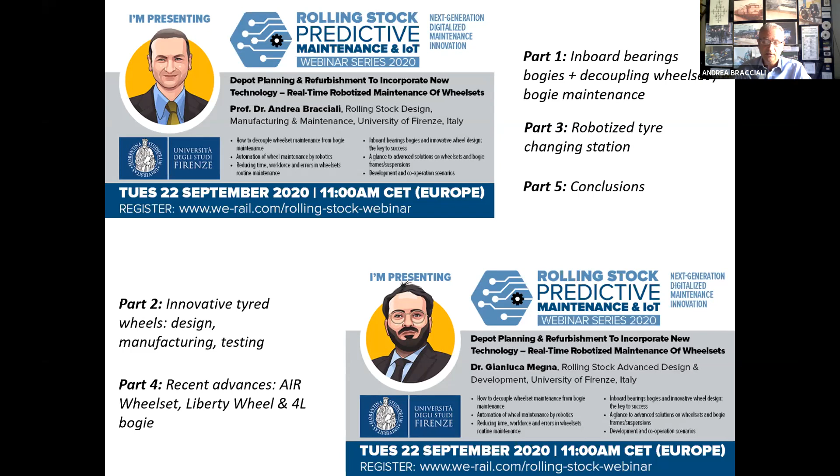I start with an introduction about inboard bearing bogies and how to decouple the wheelset-bogie maintenance, which is at the beginning of our study, research and development of a new geometry for tyred wheels.

Basically, we know that since the beginning of the railway era, we've had a mixture of inboard bearing bogies and outboard bearing bogies. Even the Rocket was manufactured with 2 types of bearings, so the locomotives had inboard bearing bogies and the tender had outboard bearings. The same principle remained along the years for many decades, for more than one century or one and a half centuries.

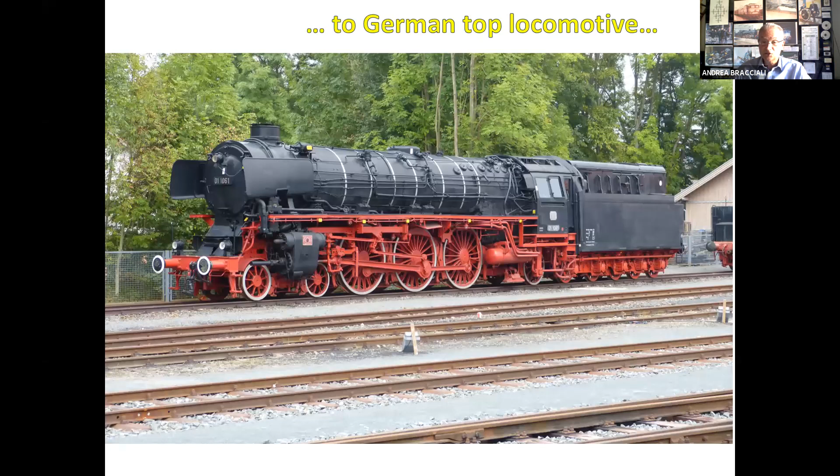In all steam locomotives, like the Italian top locomotive, the German, the French, or even the British top locomotive - everybody knows the Class A4 by Sir Nigel Gresley, one of the most famous locomotives in the world - they all had one component in common, the inboard bearing bogie. So this is certainly not new, it's something that existed since the beginning of the railways.

But in recent years it has gained a great revival, or great fame, because of some important features.

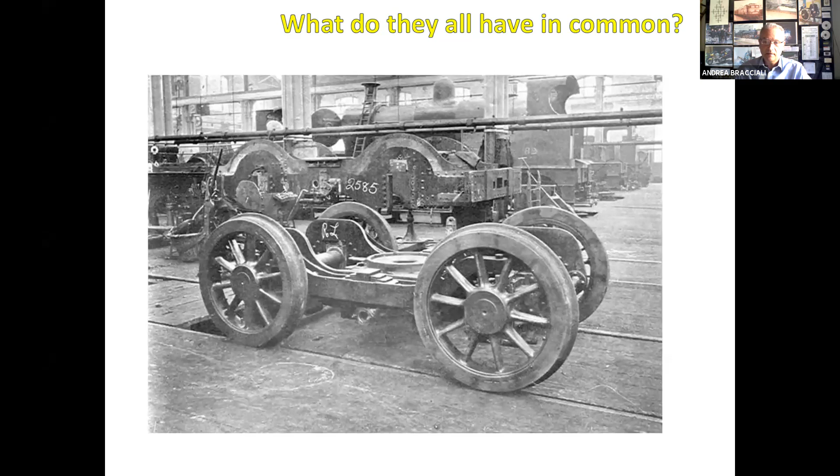Great Britain has been the country where the modern inboard bearing bogies were developed. Probably some of you know the studies by British Rail Research that led, at the end of the 80s, to the rollout of the B5000 bogie, in 1989. I personally had the chance and great pleasure of meeting one of the designers of the B5000 bogie.

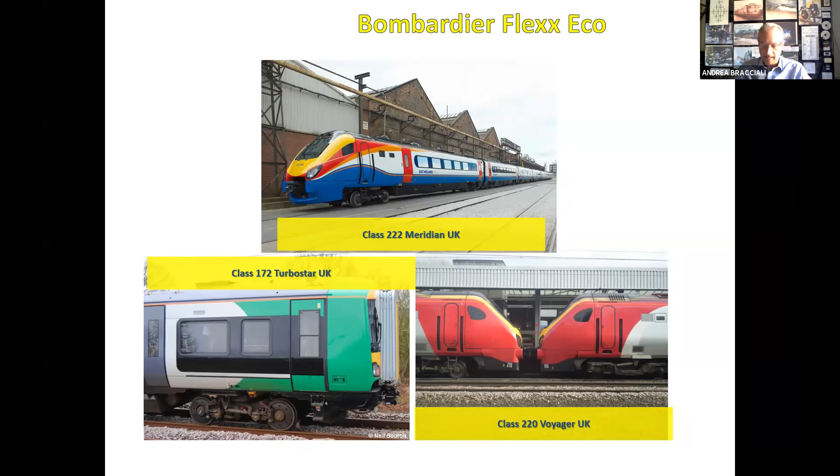A number of vehicle classes were running in the UK in the last decades, equipped with inboard bearing bogies. The project was then developed by Bombardier, which today markets a further developed bogie under the brand name FLEXX Eco.

This FLEXX Eco bogie developed further along the years - I know many colleagues in Derby who worked on this bogie - and recently it was widespread in the Aventra class of vehicles, which has a number of variants because it was bought by different operators. As of nearly 3 years ago, more than 2,500 vehicles were ordered by 6 operators. So inboard bearing bogies by Bombardier are widespread in the UK.

Bombardier is not the only company developing this kind of bogie. Hitachi has developed an inboard bearing bogie for the trailer car of the IEP class, a huge program to renovate and renew the fleet of intercity trains in the UK.

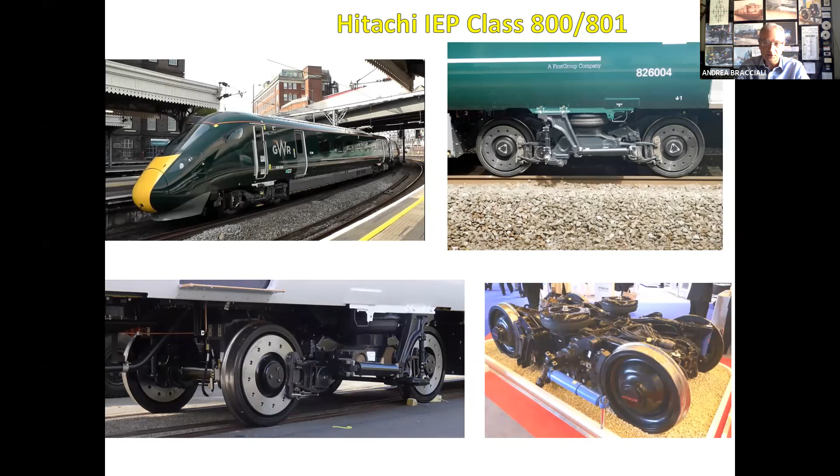The same concept was developed by Siemens for the SF7000 bogie that equips the Class 700, the Thameslink Desiro City. This bogie was so successful that we'll go back to this in a few seconds.

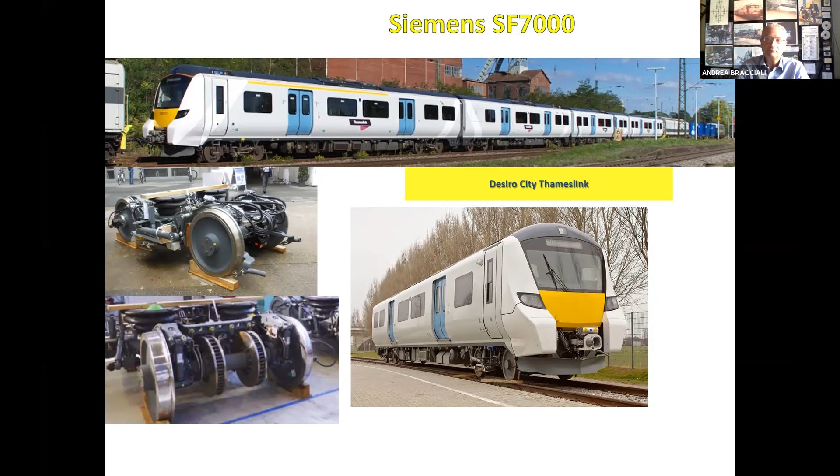More recently, CAF delivered to TransPennine Express some EMUs called the Class 397. You see some pictures of the vehicle: in the top right, at Velim circuit in Czech Republic during testing, and in the lower picture somewhere in England. You see that this vehicle has brake discs mounted on the wheel web.

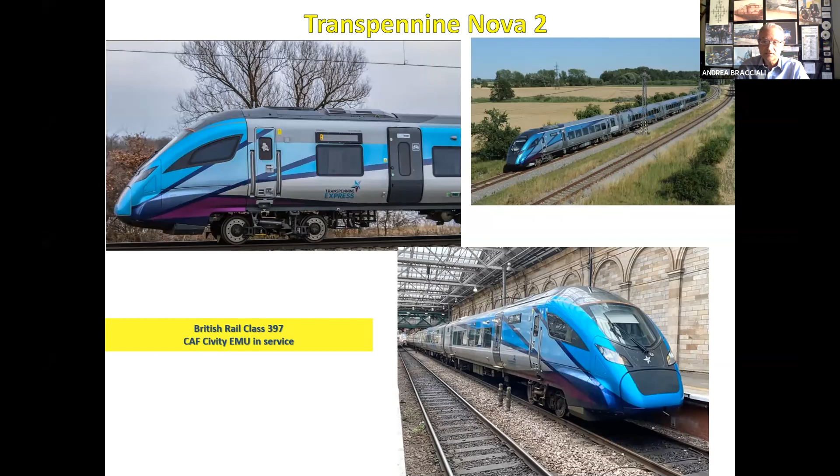Similarly, similar vehicles were developed by CAF as conventional trains, so no EMUs, but shuttle trains. This is a Transpennine Nova 3, and beyond the locomotive, that is a diesel locomotive manufactured by Stadler, CAF supplied the Mark 5A coaches.

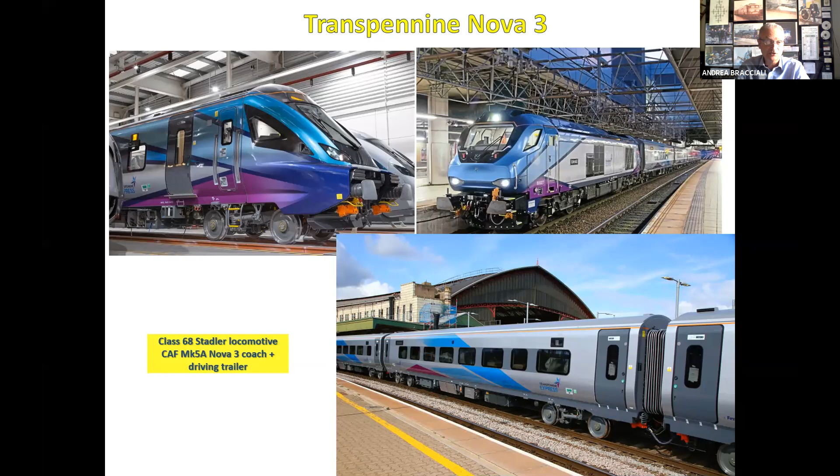You see that the brake discs here are mounted on the axle, and the wheels have no components attached on them. The same vehicle, slightly different, is called the Mark 5 and is a Caledonian sleeper. You see some pictures; you can find plenty of pictures on the internet about these vehicles.

What is interesting to see is that the last, to my knowledge, actor that developed an inboard bearings bogie is Stadler, that designed - I know personally the designer of this bogie in Valencia in Spain, the former Vossloh company - this is Class 777 for Merseyrail. You see that there are some Jacobs bogies, so you can find conventional bogies as well as Jacobs bogies equipped with this architecture of inboard bearings.

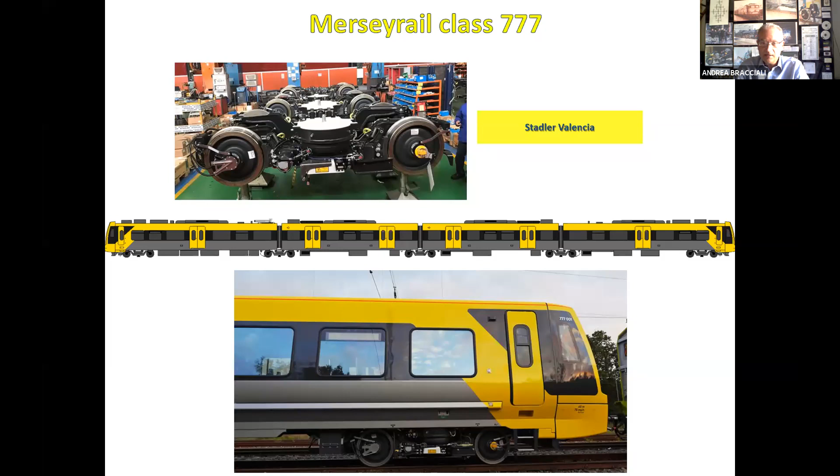Outside the UK, outside Great Britain, there are some very interesting applications. The ICE4 of the German railways, that's a train manufactured mostly by Siemens, but some rail cars, some car bodies, and the trailer bogies are manufactured by Bombardier.

It's the same concept as the Flexx Eco bogie. You see in these pictures the trailer bogies in the upper two photographs. In the lower photograph, you see two cars connected, and the rightmost one has a motor bogie by Siemens, and the leftmost one has an inboard bearings bogie. You can see the difference in the architecture, the wheel diameter, the wheelbase, and all the differences of the two bogies that are immediately apparent when you look at this picture.

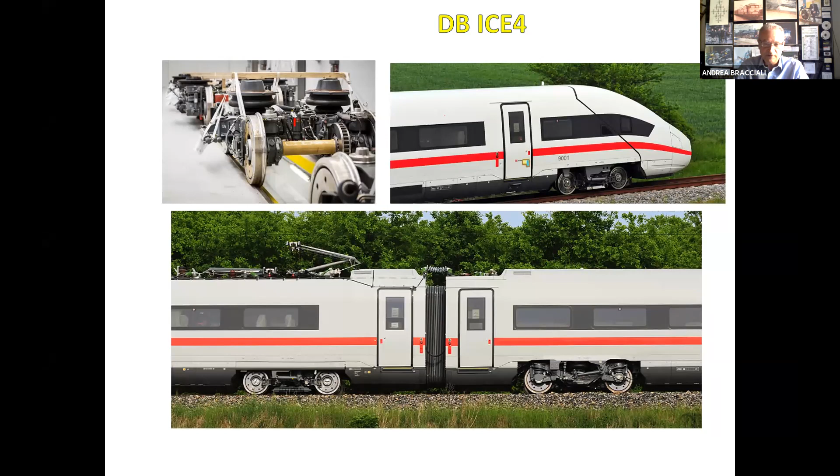The idea, the concept of inboard bearings bogies is so successful that Siemens decided to develop a specific platform for regional railways. This is an EMU, and the concept of SF7000 was developed into SF7500, which, as written in this leaflet, has greater energy efficiency, higher flexibility, and so higher and predictable profitability.

The reason for the large use of inboard bearings bogies in the UK dates back to October 17th, 2000, when the Hatfield accident put in evidence what's the problem of rolling contact fatigue and track friendliness.

Since then, a number of studies were developed in the UK, and today, to my knowledge, Great Britain, or Network Rail, is the infrastructure owner that has the most advanced track access charging method that rewards those who damage the rails the least.

And inboard bearings bogies have a distinct advantage from this point of view. So if you want a train that introduces low track damage, you probably have to use an inboard bearings bogie.

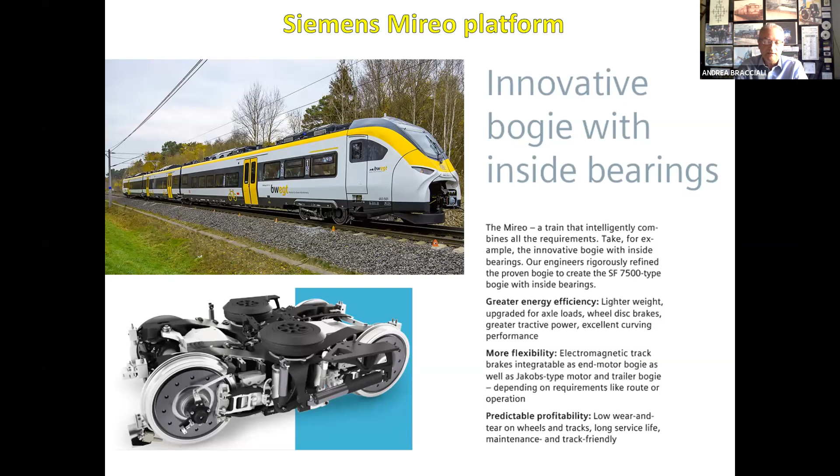This architecture is the best starting point for our study, because if you look at the pictures - if you scroll back once you have access to this presentation - you see that many of these wheels are really in sight. There is almost nothing in front of the wheels, so the wheels can be accessed from outside without the limitations of outboard bearings bogies that have the axle box arm and the primary suspension.

If you look at the tyred wheel, this is a concept that Gianluca will develop in more detail later. The shape, the wheel consists of three parts: a wheel center, a wheel tire, and a retaining ring that in the UK is also known as a Gibson ring.

Today, wheels are designed for infinite life and axles are designed for infinite life. But as a matter of fact, monoblock wheels are scrapped when the tread or the flange are worn, and the whole wheel is scrapped, despite the fact that it was designed, I repeat, for infinite life.

Axles as well have a finite life, because removing worn wheel sets and installing new wheels may damage the wheel seats on the axle, so the axle has to be reprofiled from time to time, and at the end it results in the need of scrapping the axle, even if it was designed to have an infinite life. So also axles at the end have finite life.

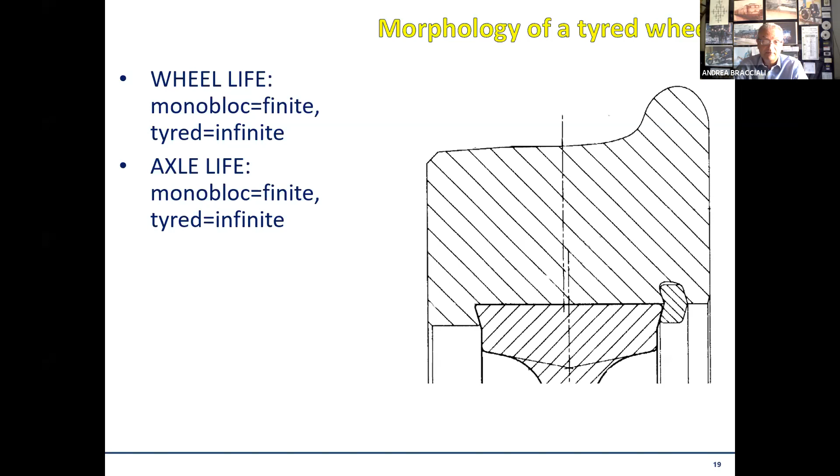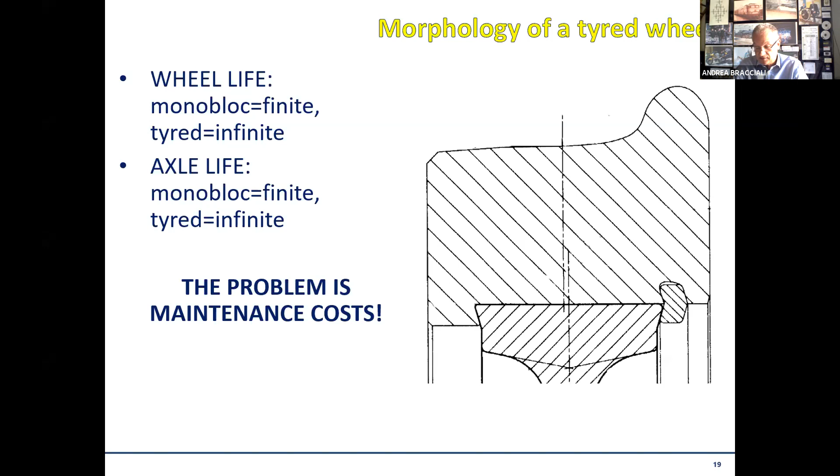The problem of tyred wheels is maintenance, because maintenance of tyred wheels is particularly expensive. I have shot some pictures in a workshop that is homologated.

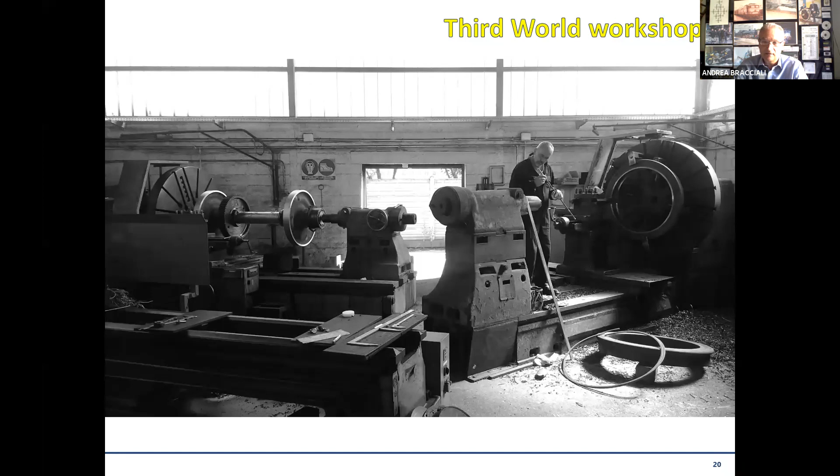It is qualified to perform maintenance to tyred wheels. These pictures were not shot 50 years ago, but just a couple of years ago. It looks like we are in the 50s, but it's just 2018, and this workshop is in Italy. Everything is manual, not automated. It's just the operator that has to decide the diameters, check everything, and clearly this is a nightmare from a costs and working time point of view.

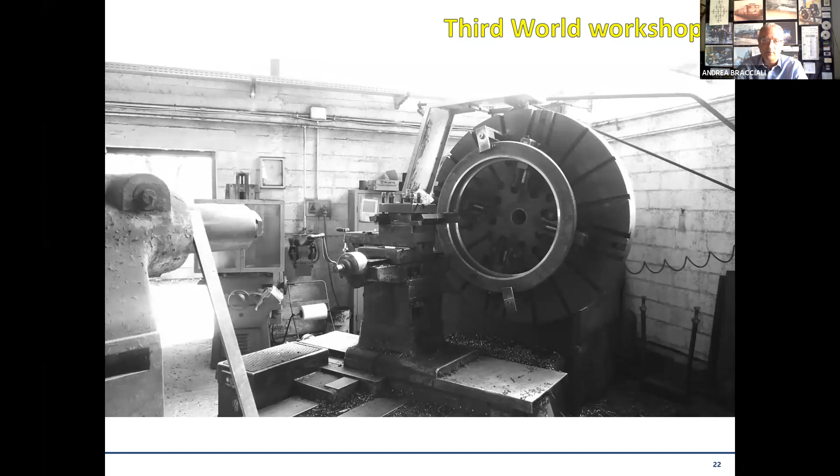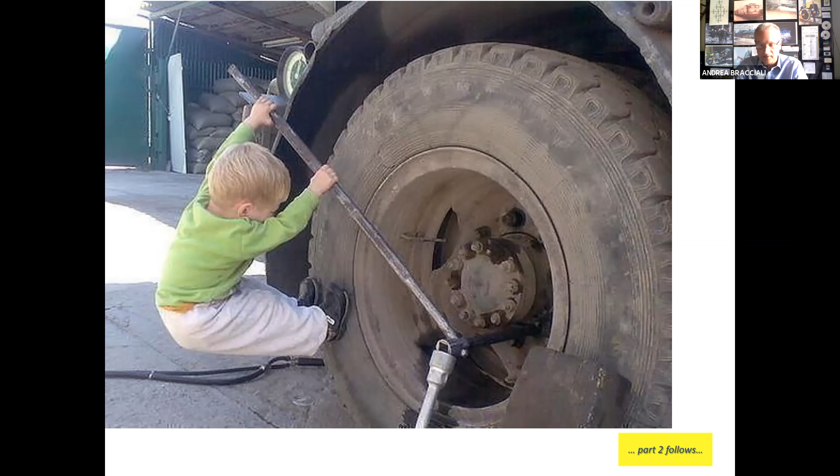But the idea would be to have the possibility of changing the wheels, as this little child does. This is what Gianluca will explain in part 4, as part of our other ideas. We will not discuss too much about this today. I would like to pass the microphone to Gianluca now.

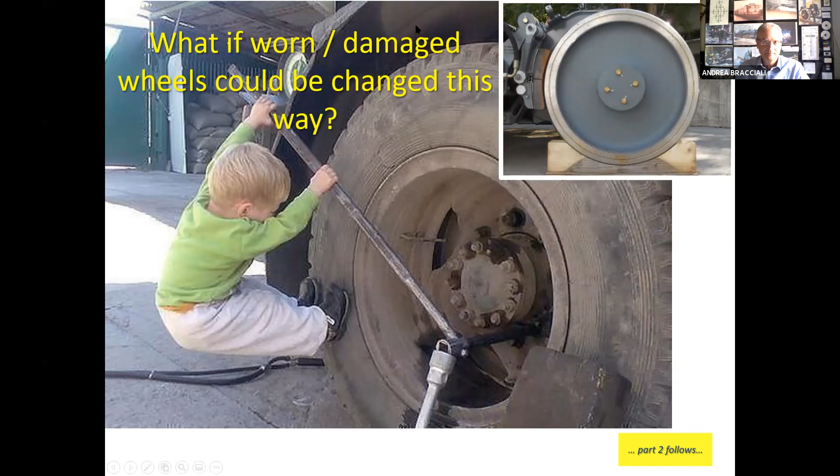I'm starting the second part of the presentation. In this second part, we pass from bogies to wheels, and we are going to see the design, manufacturing, and testing phases of an innovative tyred wheel that we have developed.

As explained briefly by Professor Bracciali, today monoblock wheels are the preferred solution for vehicle manufacturers, and they have almost completely replaced tyred wheels. There are several reasons for this choice, but the main one is maintenance. Monoblock wheels have simpler maintenance because tyred wheels are made of three components: the wheel center fitted on the axle, the tire fitted on the wheel center, and finally a retaining ring applied manually to complete the assembly.

The procedures and operations to complete this assembly are quite long, and often several machines and tools are needed, while in monoblock wheels the replacement of the wheel is the only operation, and there is no need for special tools or anything like that. So a big automation has been reached in the last years.

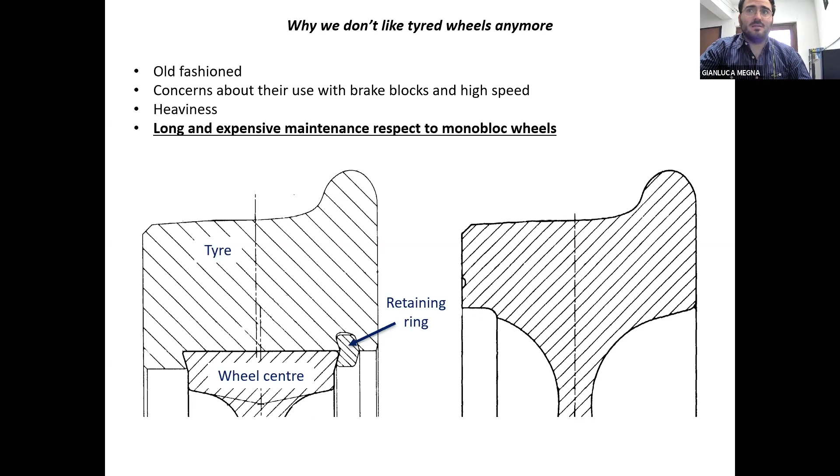So the main advantage of having a removable tire, and therefore reducing the purchasing cost, for example, or having an infinite life component as the wheel center, just like the axle—these advantages are cancelled by the tire fitting and removal processes. Here you can see a short simulation of the tire fitting, and the mounting parameters such as the thickness of the tire, the mechanical interference between the tire and wheel center, bring also high stresses and strains in the wheel center.

So tire fitting has to be carefully defined beforehand, in the design phase.

Here you can see some pictures of a tire replacement of a tyred wheel. In the top left picture, you can see the wheel set placed on a wheel lathe and the mechanical removal of the retaining ring. So the wheel set is moved to an alternating saw where the tire is cut, and then it is extracted.

Often the extraction of the tire leaves some scratches on the wheel center, on the external part, and therefore it has to be machined again, and the mating diameter changes, and the new tire has to be adapted to this new diameter. So there is no interchangeability between components, and the process is an adaptive process.

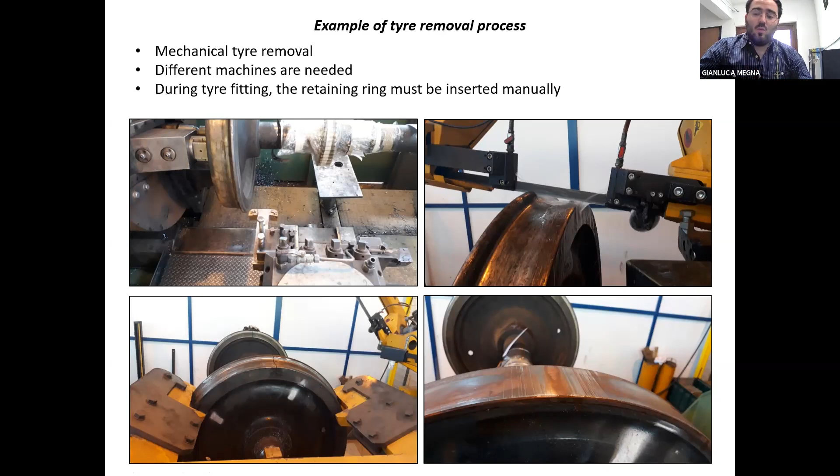One way to remove this problem is to use heating to heat the tire and remove it. Here you can see an induction heater applied to a worn tire, but the mechanical removal of the retaining ring has to be maintained. Here you can see, in the yellow box, the grooves left by the wheel lathe to mechanically remove the retaining ring.

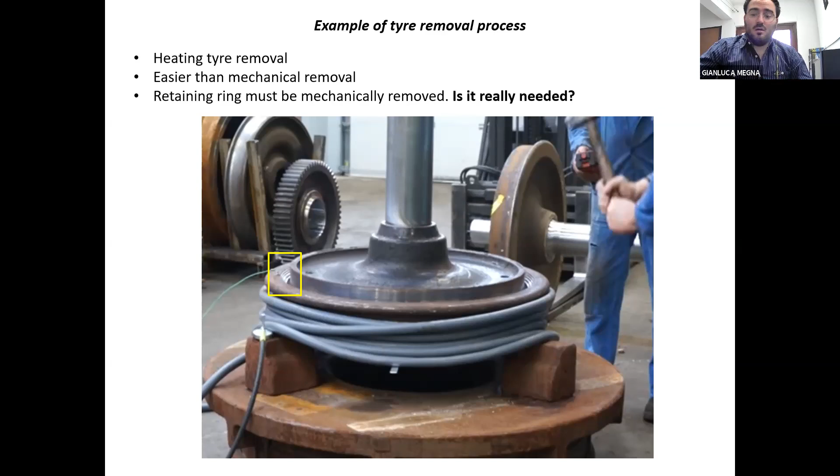So the retaining ring is the main obstacle for the improvement of the maintenance of tyred wheels. And the question is if it is really needed, and the answer is no. The reason for using a retaining ring has to be found considering the tread braking problem.

Tread braking in all railway vehicles is critical, especially for freight vehicles. Also monoblock wheels suffer from tread braking, and cracks could be generated, and a specific design needs to be applied also for monoblock wheels.

Tyred wheels were developed when tread braking was the only solution, and therefore all the mounting parameters such as tire thickness and mechanical interference between the tire and the wheel center were developed to withstand this kind of thermal input.

But in 1968, some tests showed that the loosening time of the tire could be lower than 10 minutes if a continuous braking power is applied. So tyred wheels are unsuitable for drag braking and tread braking.

The retaining ring is the only component that locks the tire radially when the problem of easing during tread braking is generated. But today we have disc brakes in almost all passenger vehicles, and electric braking from the motors, and other solutions, so tread braking is not so critical anymore, at least for passenger vehicles and not for freight vehicles.

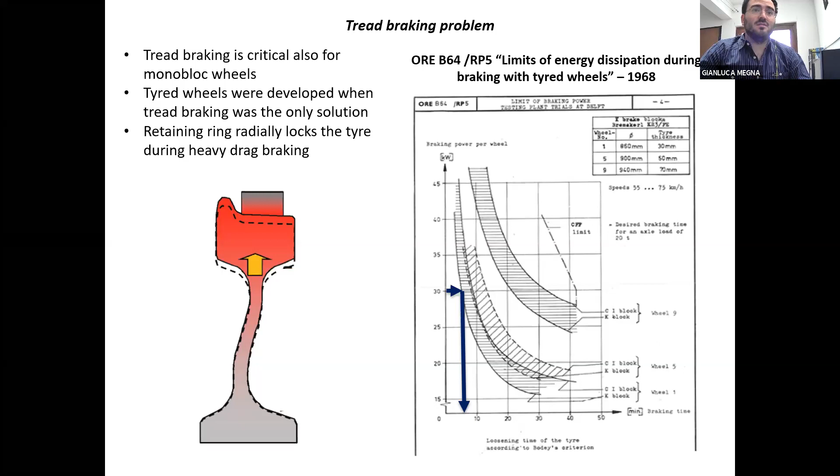So we can do something more to improve this kind of wheel design for vehicles not equipped with tread braking. The solution we proposed is a simpler dovetail coupling, a double conical coupling that can be easily machined with modern CNC machines. Obviously, the dovetail in this picture is amplified, but we can see some real pictures in the following.

Thanks to the elimination of the retaining ring, we can achieve an easier fitting and removal of the tire, using heating, for example an induction heater, to heat the tire and remove and fit them.

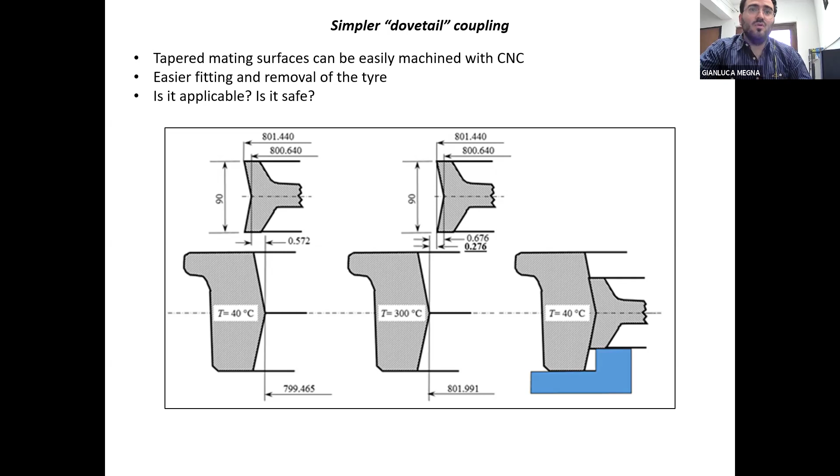Some finite element calculations have been performed to understand if the coupling is safe from a mechanical resistance point of view. We simulated a brake pressure test on the tire, and we have seen that no displacement between the tire and wheel center is reached even with a lateral force 10 times greater than the maximum lateral wheel-rail contact force.

As you can see in the picture below, we have developed an asymmetric coupling because the lateral forces at the wheel-rail contact are different according to the direction of application of the lateral force. This comes from the design code for all railway wheels according to EN standards.

So the coupling is safe, and therefore we decided to produce some prototypes. Here you can see some pictures about the machining of the tires, the machining of the wheel center, and the results on both of them are visible here.

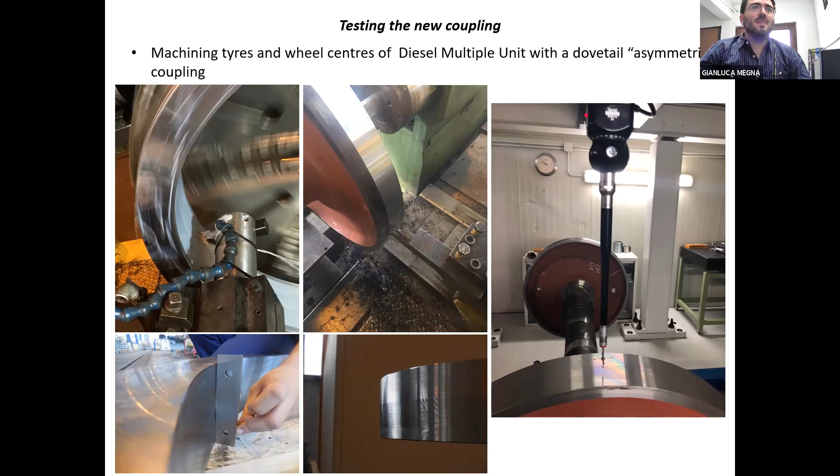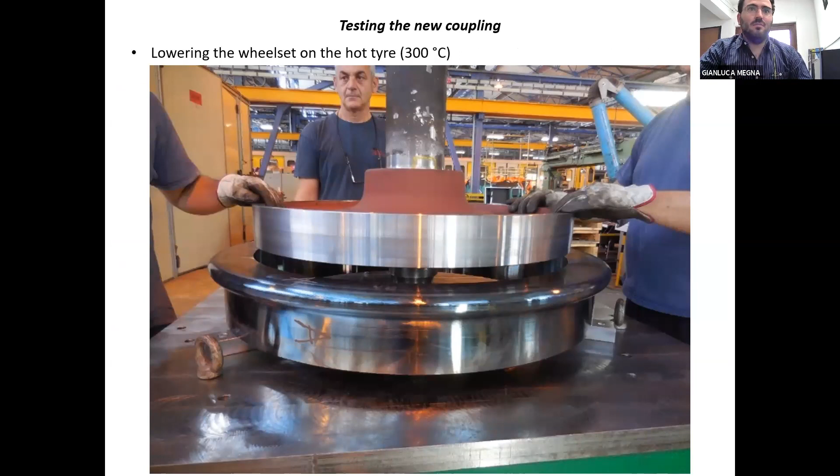Then we mounted the tires on the wheel centers. Due to the shape of the new coupling, the mounting has to be done vertically, so it could be a problem, but we found the solution later.

After the cooling of the tire, we performed some measurements to verify that all the tolerances according to EN standards were respected. For example, axial runout, radial runout, width gauge, and unbalances were measured, and even with fully finished tires, all these measurements were within good tolerances.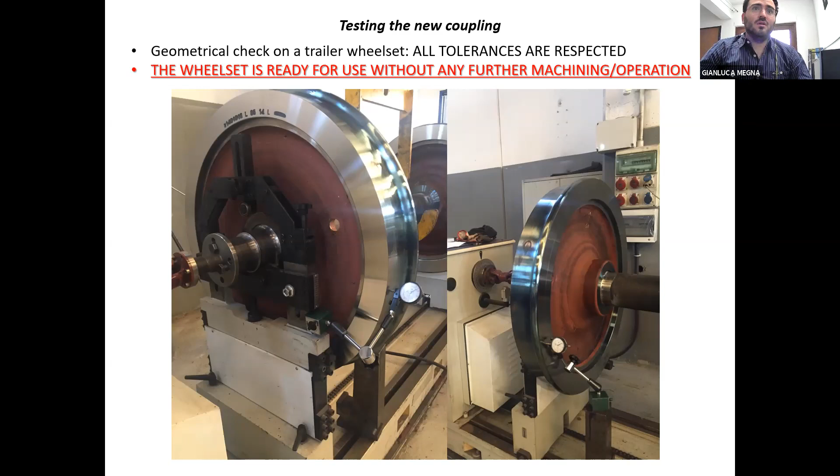So no further machining or operation was needed after the mounting of the tires. We prepared 4 wheel sets to be assembled on 2 bogies, so 1 coach, and we performed 2 days of testing. Here you can see a picture.

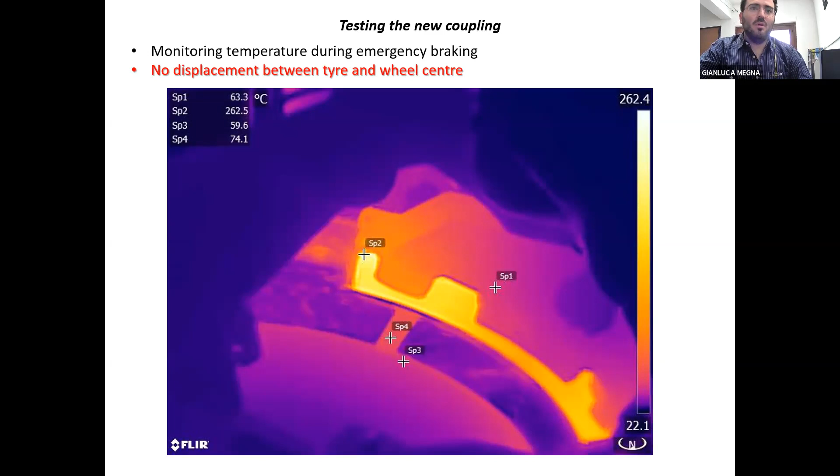During this test, several stopping and starting maneuvers were applied to verify the strength of the coupling. The vehicle we used had tread brakes, so we monitored the temperature using a thermal camera, and even with some emergency braking maneuvers performed, no displacement or other problem was found during this test.

So the final solution has been found considering a different kind of coupling, but it is only dictated by advantages in mounting procedures. Here you can see the final drawing.

We no longer use the dovetail, but we have a single conical surface, a single tapered surface, and we restore an abutment on the left, which is used for an axial reference during mounting. In this way the mounting can be done also horizontally and not vertically as shown before.

So this kind of solution will be made more clear in the next presentation, and I give the microphone to Professor Bracciali.

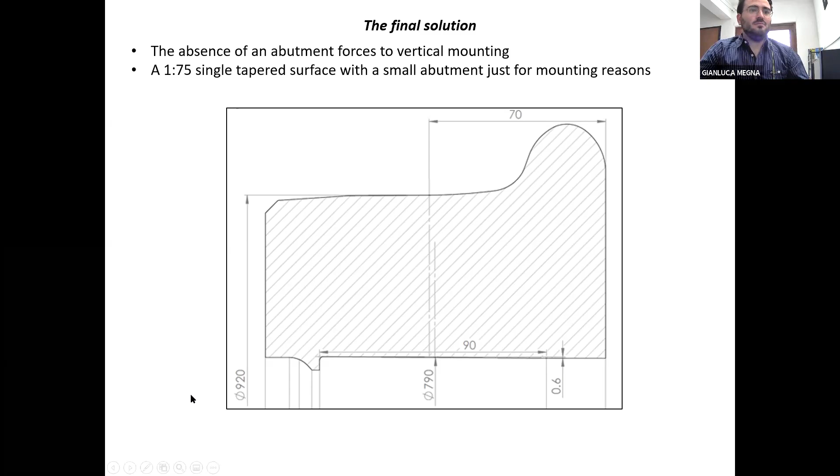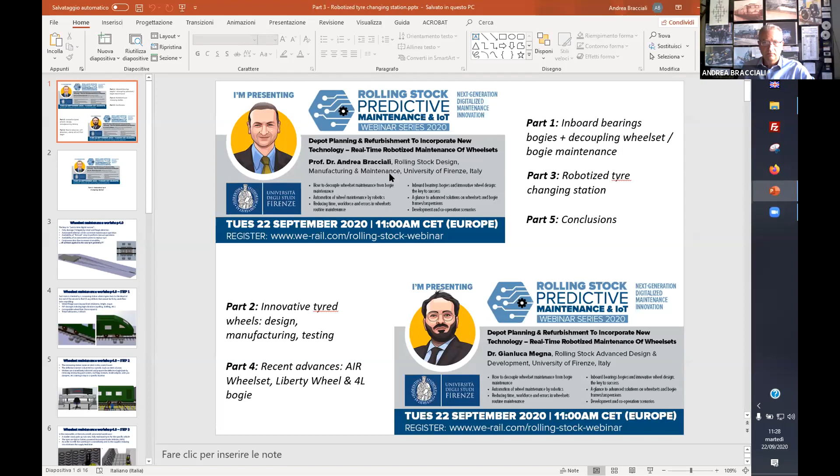So we go again with a third presentation about the tire changing station. Okay, probably you don't see me, but that should not be a problem, I think.

This will ensure continuous flow of data for traceability and for management of new material, purchasing material, and scrapping old material.

Let's look at the steps of a fully automated robotized station we have conceived. First, the train goes back to the depot, let's say around midnight, at the end of the service, and the measuring station checks if the wheels have something wrong.

It checks for wear, for example thickness, height, or slope of the flange, or if there are any RCF damages that introduce high vibrations in the rails, like spalling, shelling, or any other irregularity on the wheel tread surface. If there are wheel flats not compatible with service, or more generally any plastic flow or wear, like tread hollowness or rollover, that have to be corrected.

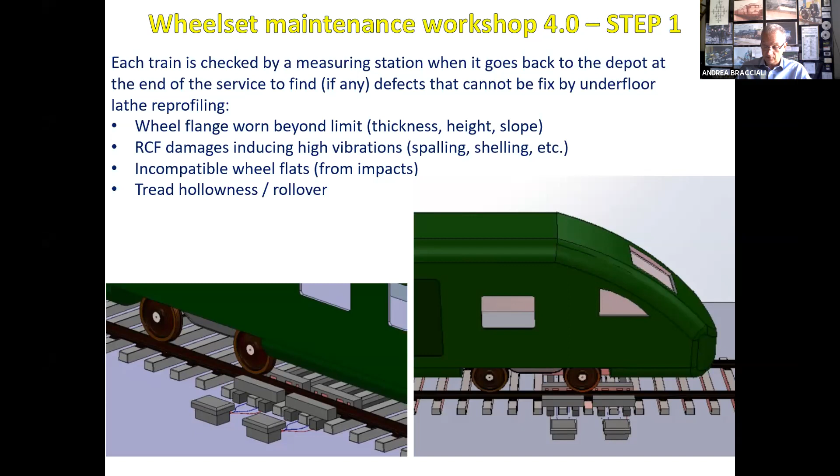Let's suppose the train goes on the measuring station, and the measuring station raises an alert to the control tower. The train is diverted to a specific track on steel columns where workers prepare the axle, or rather the wheels, to be changed, removing the parts that may obstruct accessibility, like stairs, earthing contacts, brake calipers, anti-yaw dampers, or whatever may obstruct accessibility to the wheel.

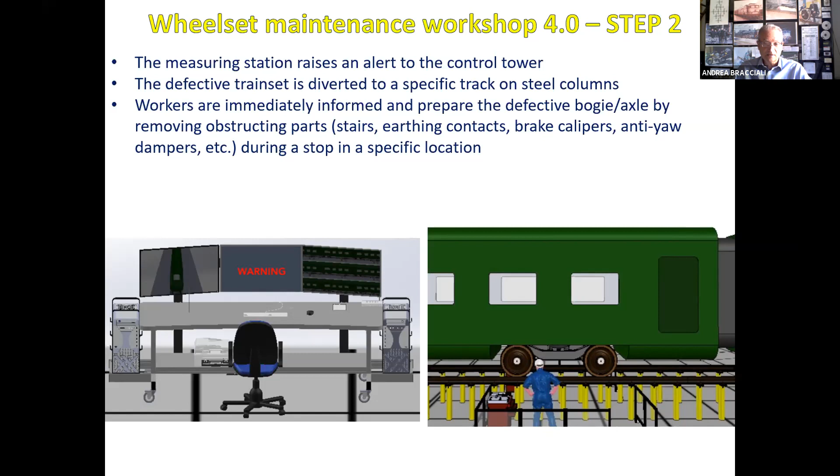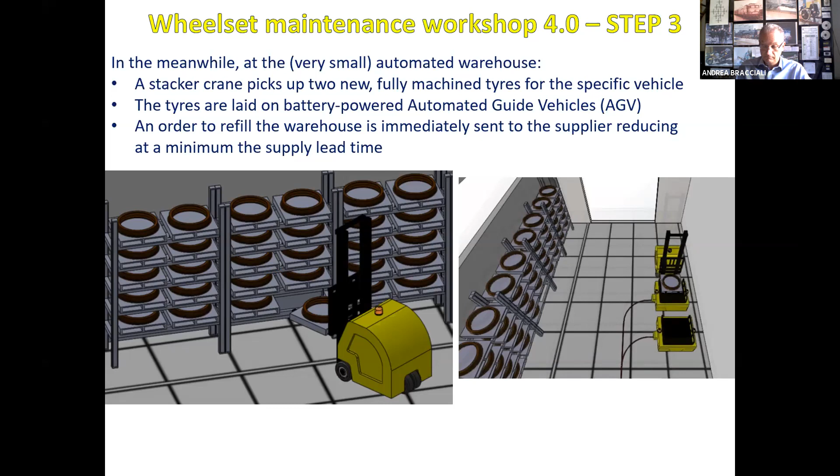In the meanwhile, a fully automated warehouse is used to pick up a couple of new, fully machined tires, so they are ready to be installed. The tires are laid on automated guided vehicles that reach the workshop and enter the area that is normally protected by safety barriers for several reasons.

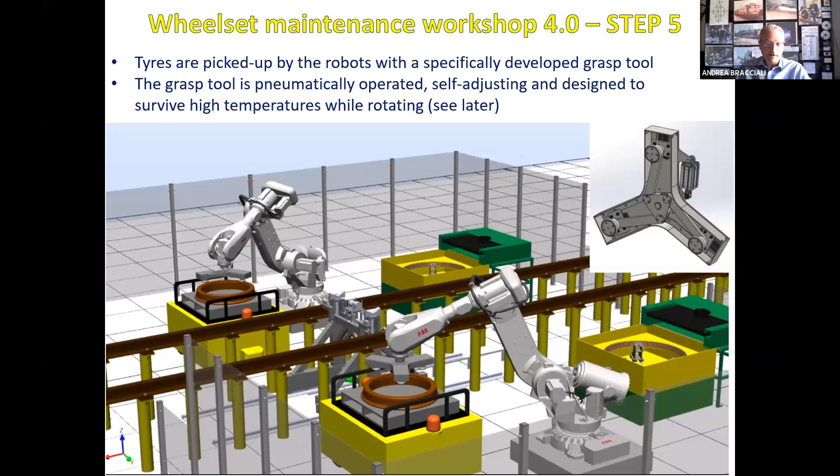We'll see them later. The tires are brought near the robots that will perform the maintenance. The new tires are then picked up, grasped by a special end effector, and put on the heating stations on the right side in this picture, where induction heaters can raise the temperature.

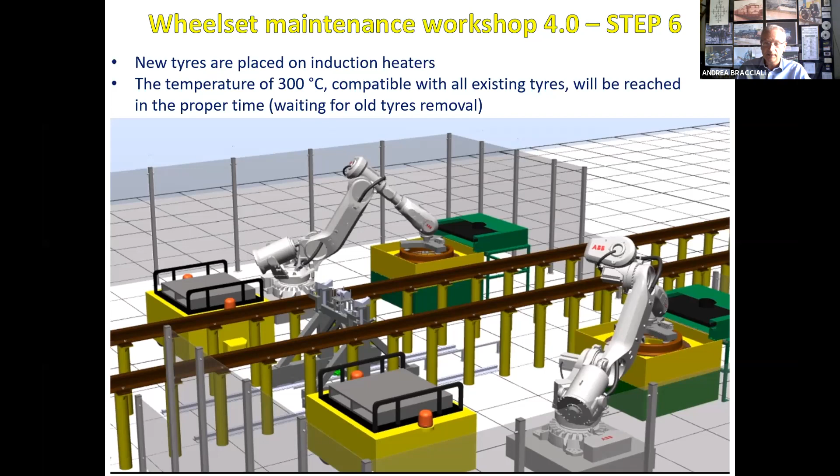The heaters raise the temperature up to 300 Celsius, which is compatible with all existing tires according to all the regulations on tires. So this temperature is certainly allowed. The heating is not immediately started because the tire removal is longer than heating, so heating will be started later.

The train is then moved close enough. There is a tolerance of plus or minus 1 meter in our design, and a special cart is moved along the track in the pit under the vehicle until it reaches the defective wheel set.

You see that there are two jacks that lift the wheel set up by properly interfacing with the axle box. So the cart places itself exactly under the axle boxes, lifting up the axle.

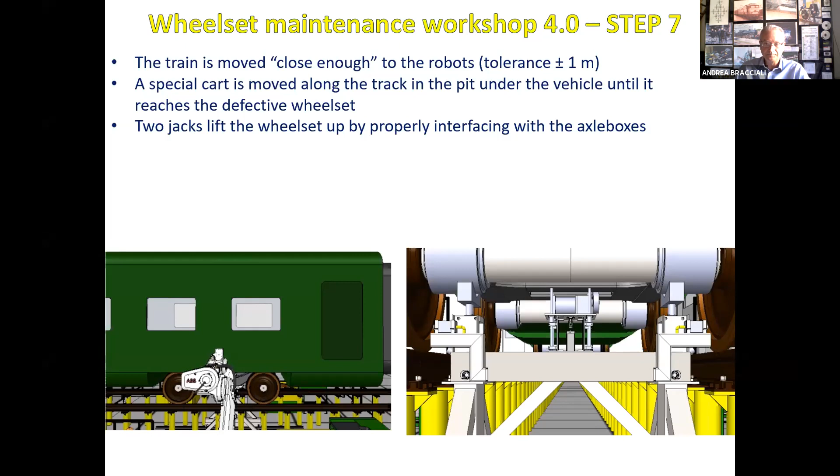Then a rubber roller starts driving the axle. We have checked this can be done with motor axles as well as trailer axles, so it can work without damaging the paint. In the meanwhile, high power lasers heat up the worn tires.

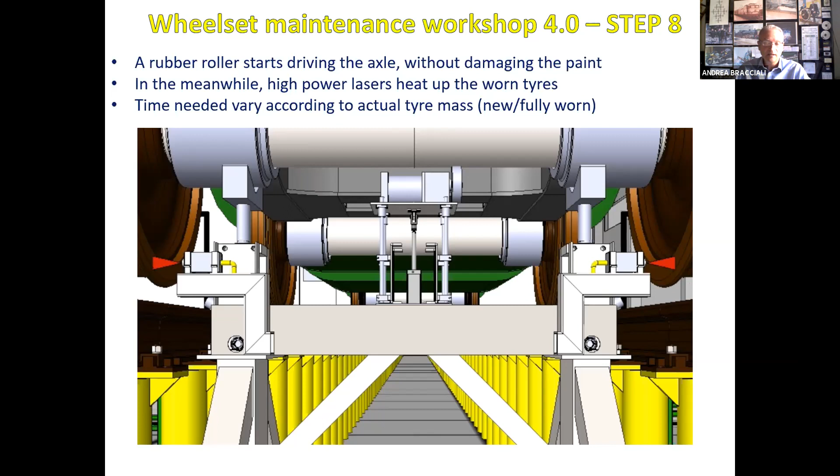This is a quite lengthy process. It may take 10 to 20 minutes, depending on the amount of material that has to be heated. If you have a fully worn tire, its thickness and the amount of material to be heated is certainly lower than a new tire that has to be replaced for other reasons. But in that case, heating times can be extremely longer, much longer.

Then, when the tire is loose on the wheel center, the robots pick up the worn defective tires while rotating, and they lay the worn tires on the AGVs as before.

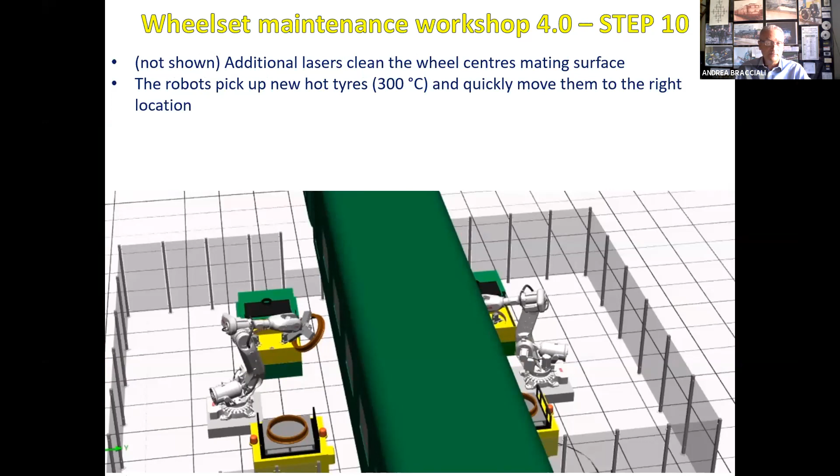At that time, the new tires are already hot at the right temperature of 300 Celsius, and the robots quickly move them to the right location and install them on the wheel centers. What's interesting is that the end effector, the clamp, the hand that moves the tires, can rotate.

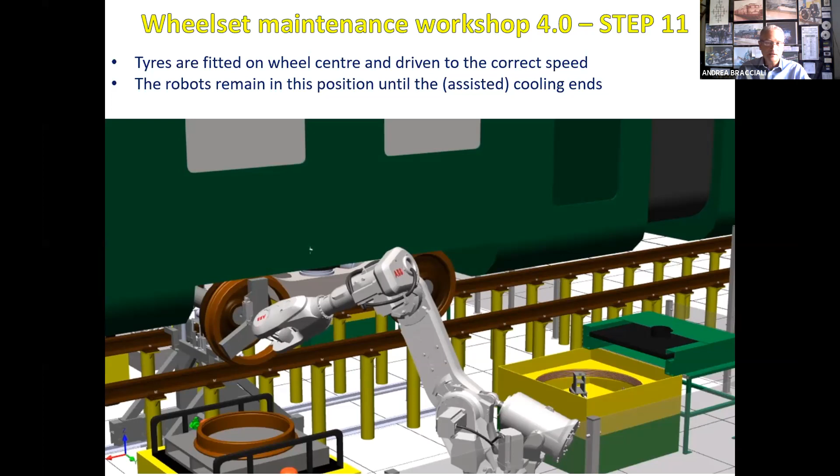So cooling is obtained while rotating, and this means cooling is uniform, and the robots remain in this position until the cooling phase ends. Then, very quickly, the wheelset is lowered down on the track. When the temperature is at around 70 to 80 Celsius, it may take some 15 to 20 minutes to cool down the tire sufficiently.

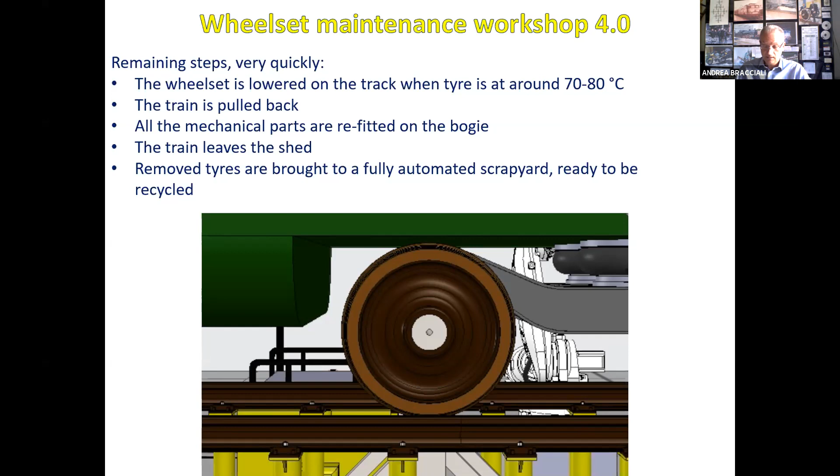The train is pulled back, all the mechanical parts are refitted on the bogie, the train leaves the shed, and all the removed tires are brought to a fully automated scrapyard ready to be recycled. What's interesting is that the whole process may take less than 5 hours.

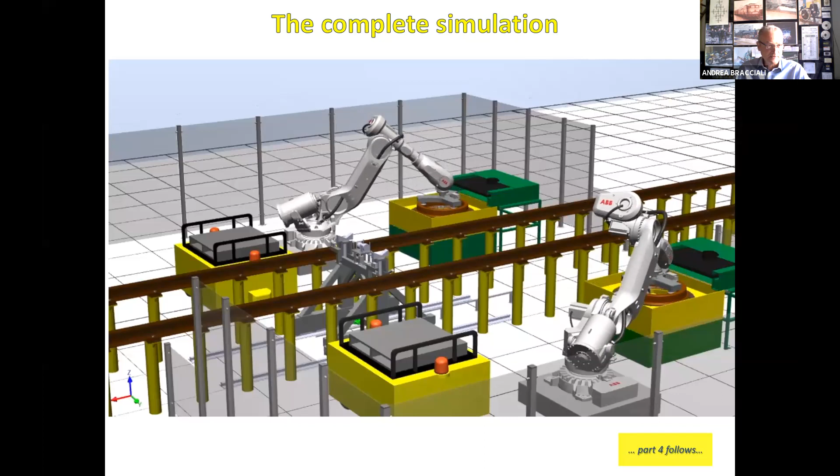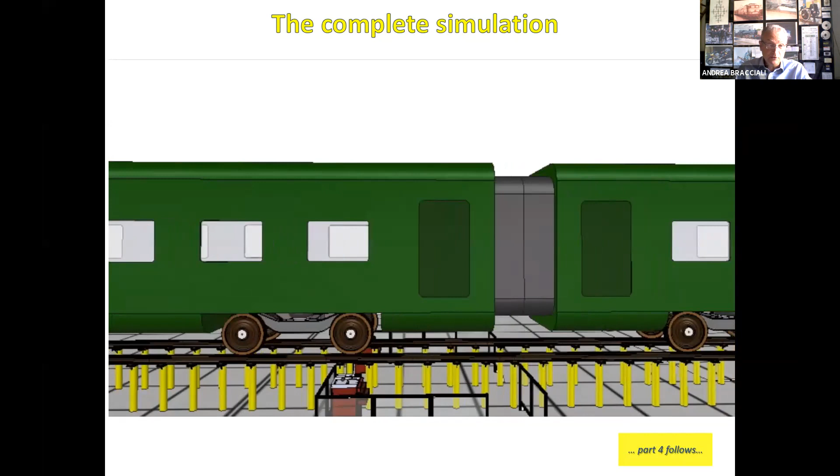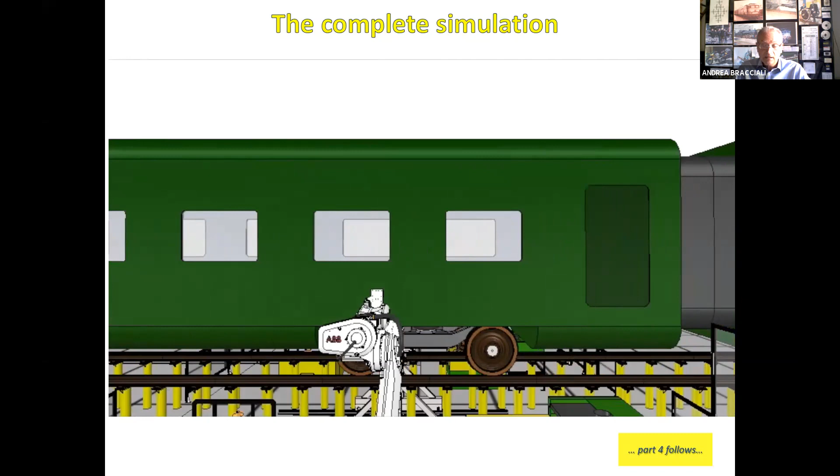I would like to say that all the environment you see here has been modeled using SolidWorks CAD system, and the movements of the robots you have seen are not just an animation, but the results of robot programming using RobotStudio software. If you have a robot like this, you can simply upload the software we have developed, and the robot performs exactly what you have seen in this video, including all the validations in terms of masses and inertia calculations. This is not just a nice video; it's the result of a real simulation.

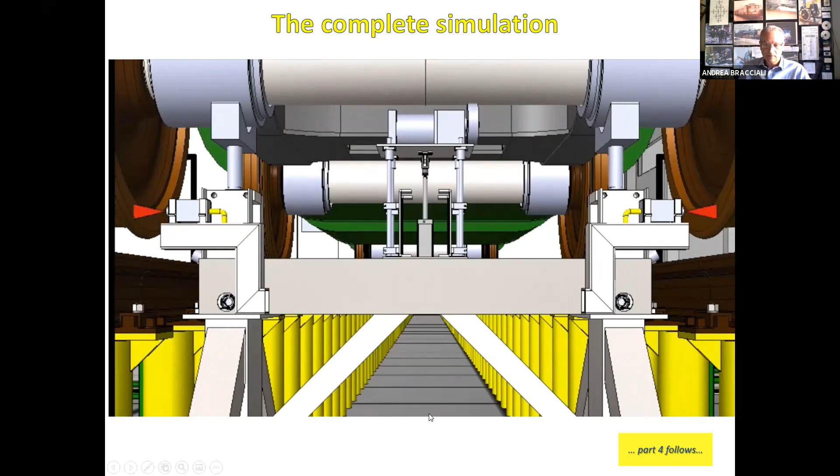This is the end of the video. It lasts some more, nearly 1 minute or something like that, but I think you have seen the most important parts, showing the old tire being removed and the new tire going in place.

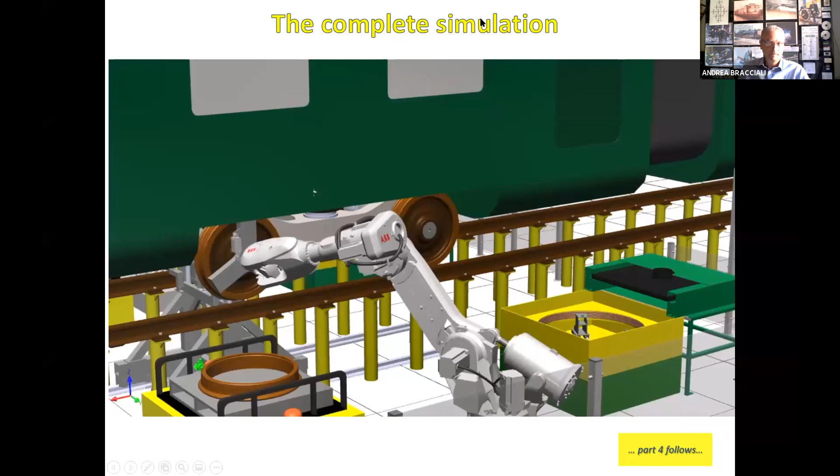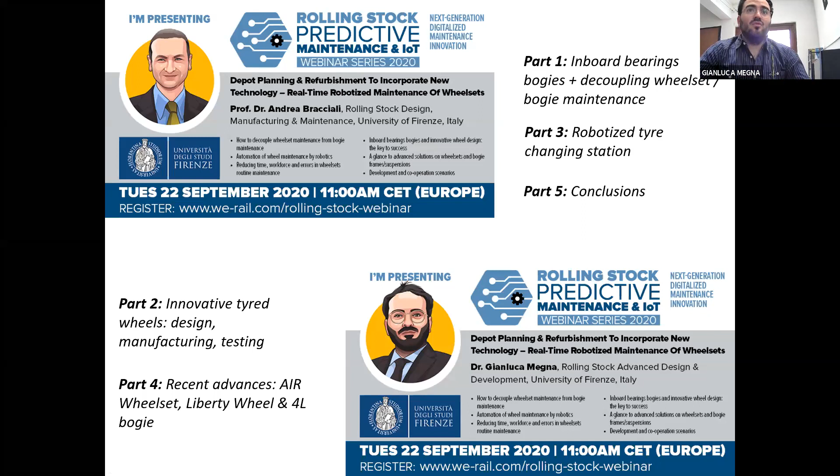Okay, thank you again. The fourth part of the presentation is quite brief. It should be a few minutes just to introduce some other development that we have formed in terms of improvement of maintenance of railway vehicles.

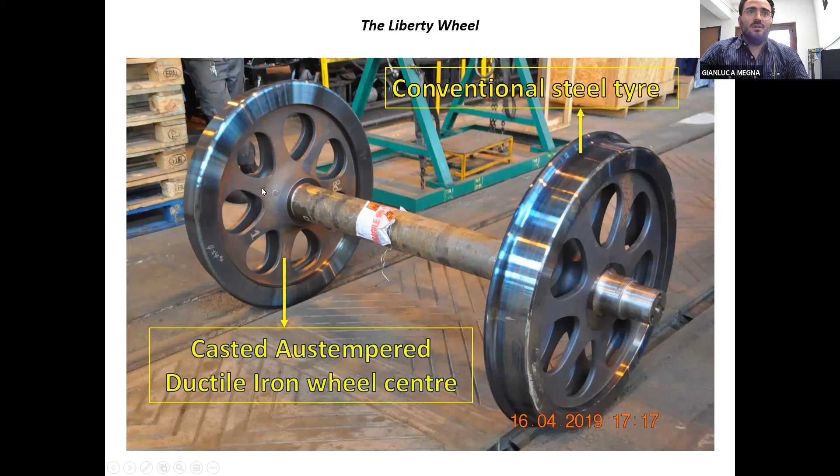The first is the Liberty Wheel, that is a product, not only a study, and we have applied the principle of conical mating to a brand new wheel center. The wheel center that you can see here in the picture is made of austempered ductile iron, so it is a light and optimized wheel center.

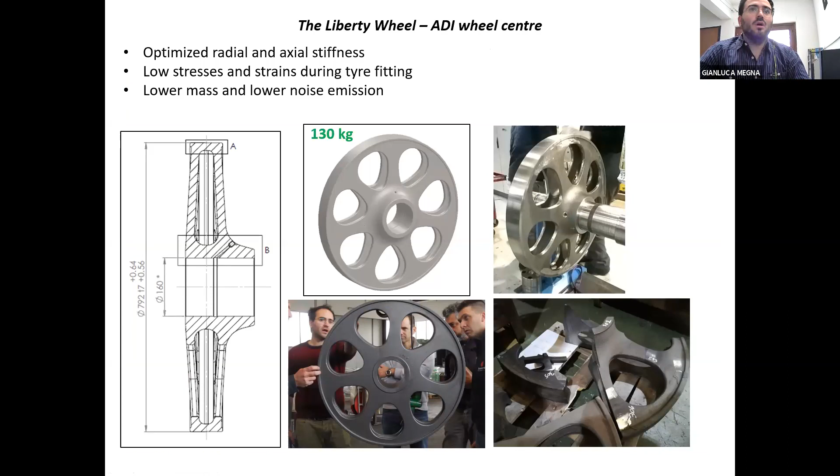Radial and axial stiffness are carefully defined by finite element method. We have got also lower mass and lower noise emission. Here you can see some pictures, but I think there is no time to go through this topic. Some pictures also from the testing point of view of this kind of product. Here you can see some fatigue tests that we have performed, and also some inline tests that we have made with this kind of solution.

Another kind of solution is called AIR wheelset. AIR stands for apparently independently rotating wheelset, and it is specifically designed for inboard bearing bogies or inside frame bogies. The main advantage is that all the main components, for example the wheels, the brake disc, and the bearings, are grouped in only one element, so we can perform removal and maintenance of this kind of component completely alone. The two wheels are then connected by a torsion shaft and equipped with a torque limiter to let the wheels freely rotate in sharp curves.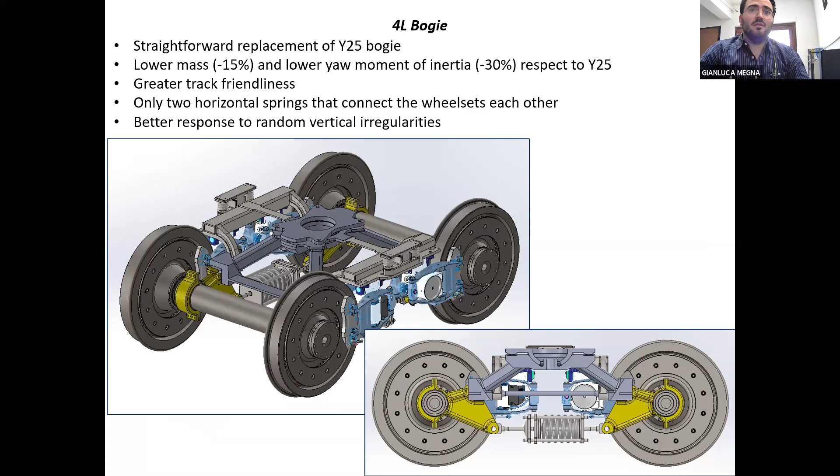Both the 4L bogie and the air wheelset are patented solutions, so they have got the approval of the patent office for Europe. So I can conclude here, and I give the microphone back to Professor Bracciali.

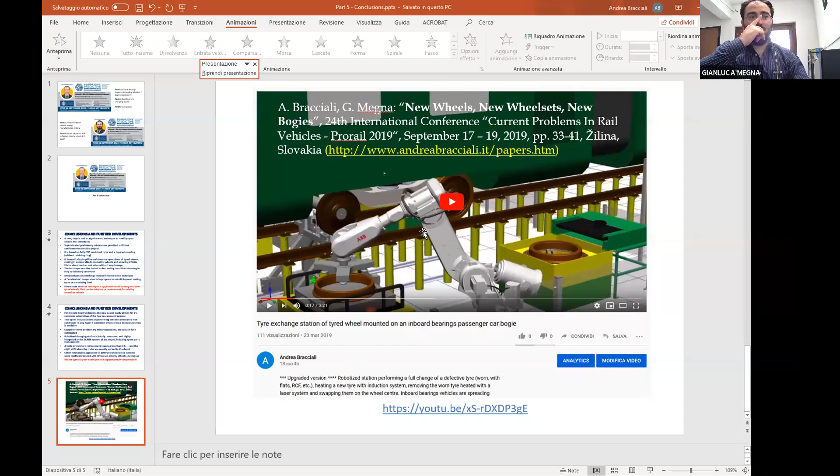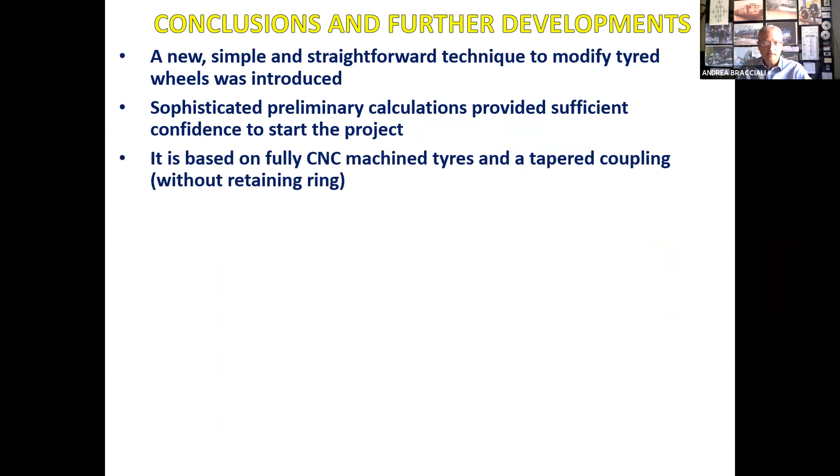Okay, so the conclusions and some hints for further developments. First of all, we have introduced a new technique to modify tyred wheels. This has been done after calculations with non-linear finite element models, which gave us sufficient confidence to start the project. It is based on fully CNC machined tires, something widespread and commonly used today, so that's not anything new. And that highlighted the fact that the Gibson ring, or retaining ring, is not necessary, so we removed it.

It dramatically simplifies maintenance operations of tyred wheels, because you just purchase fully machined tires and install them directly on wheel centers without any mechanical operation. This gives the possibility of an infinite life of wheel centers as well as axles without introducing any damage. This is something our grandfathers did - the idea was not to change wheel centers and axles, but just to change the tires.

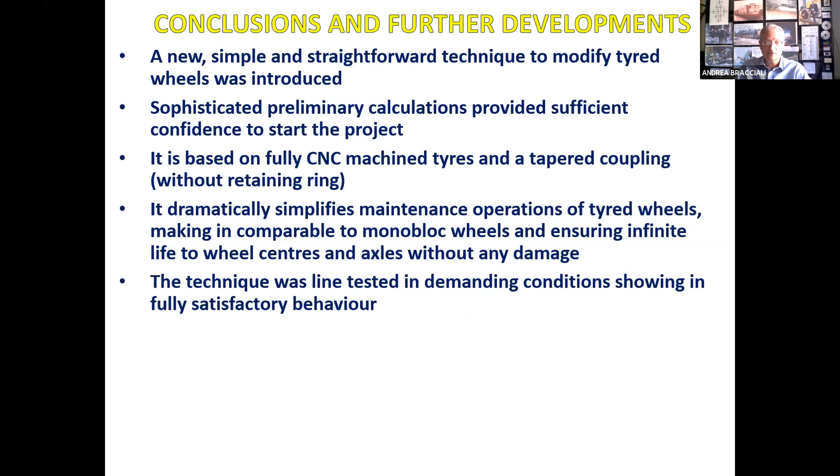The technique was line tested in demanding conditions, with block braking in sharp curves and harsh conditions, and the behavior was fully satisfactory. We got interest from many railway operators because this can really cut the costs of maintenance. And I can tell you now that we have a worldwide cooperation in progress to retrofit this type of tire on an existing fleet.

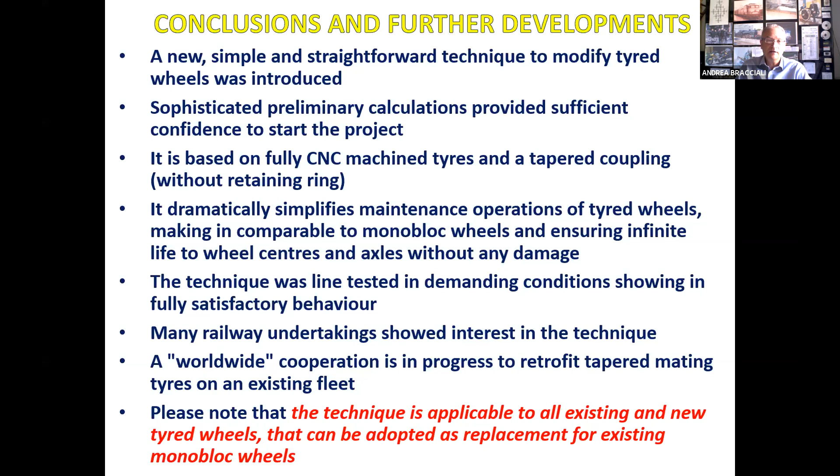Please note that this technique can be applied to all existing tyred wheels, and it's a very straightforward application. It can also be used on existing monoblock wheels. So if you are facing too high costs, or you want to be autonomous in changing the tires, you can change the wheel center and go back to the very good old tyred wheels. Then we gave you some ideas of a fully automated system to replace the tires.

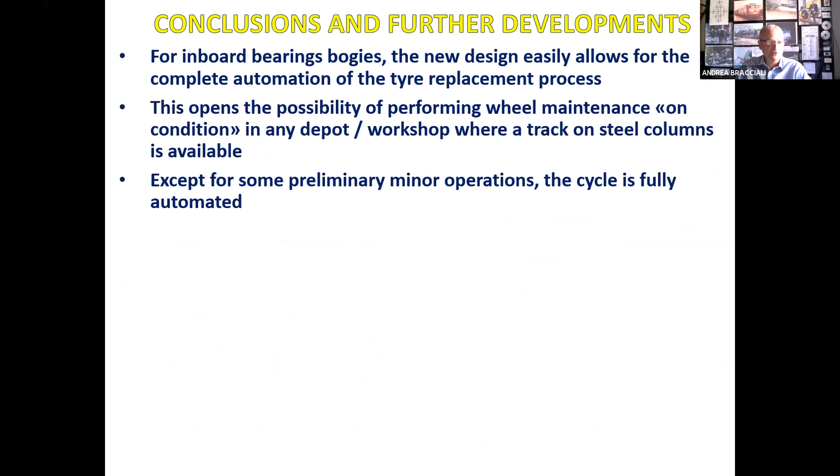This gives the possibility of changing the tires only on condition, wherever a track on steel columns is available. The cycle is fully automated except for some preliminary operations, seen before, to remove components that obstruct access to the wheels. The robotized changing station is totally unmanned, integrated into the SCADA system of your depot or workshop, including spare parts management. Both wheels tire replacement of a wheelset requires less than 5 hours.

That means you can go back at night with some defective wheels and return to service directly the morning after, without any need to replace the vehicle, stop the vehicle, or change the bogie. You just have to change the tire, and you can do that with this automated system.

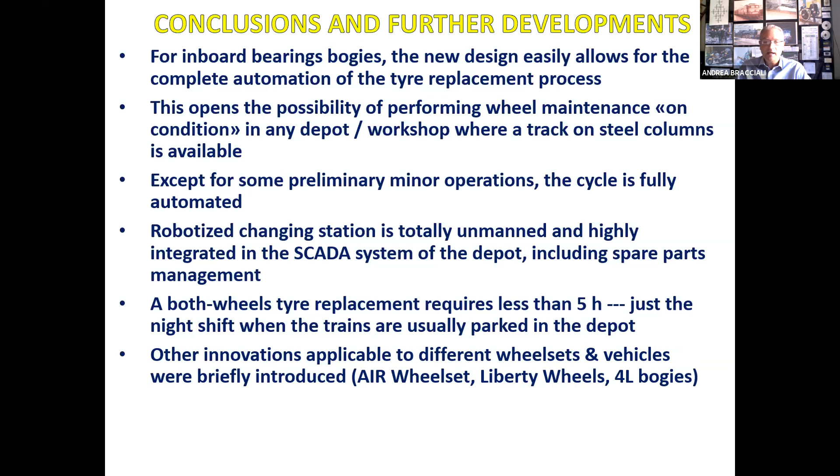We have also briefly introduced some other concepts: the air wheelset, the Liberty wheels, and the 4L bogies. We have produced a massive number of papers in conferences and published in journals, for example last year at the International Wheelset Congress in Venice, Italy.

We are open to your suggestions for cooperation. We are at your disposal to give you more details and everything you may need to implement these techniques in your company or railway. Thank you so much.

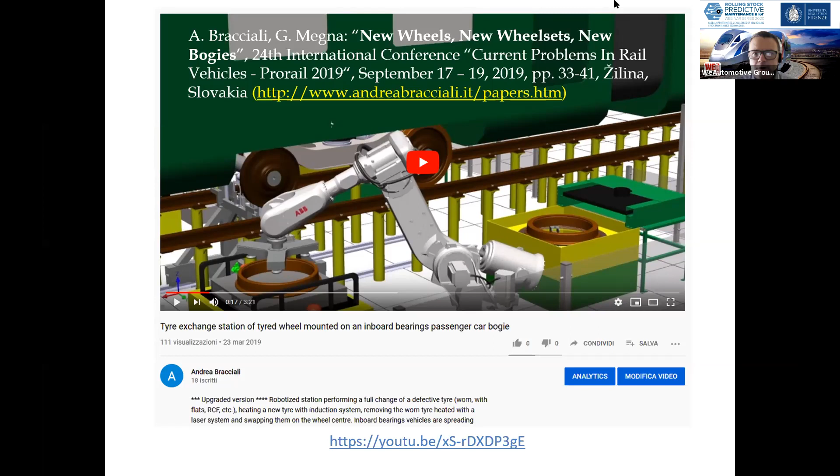Thank you very much. Next question from Nicholas: is it possible to use this type of wheel in freight cars, and what is the maximum axle load allowed? No, it is not possible to use this type of wheel in freight cars if braking is applied on the tread.

If you use disc brakes, it's possible, of course. If you use tread braking, I don't think it's a real alternative. About axle load, there are no limitations, whatever it is. Okay, thank you, Andrea.

Another question from Philip: could this process to remove the tires be used as part of an extension of the wheel lathe? Why not? We have to discuss about that.

We have some practice of machining and of how workshops are managed, so whoever is interested, we can share that. You've seen some pictures - Gianluca has shown many pictures taken in the workshop, so we have an idea of how a workshop works. Everything can be done. If you want to work with us, we are glad to help and develop something together.

Thank you. Next question: nice photos - were these examples done on site at the university workshops, or at a partner's workshop, and how recent are they? Now, unfortunately, our university is not so well equipped with machine tools.